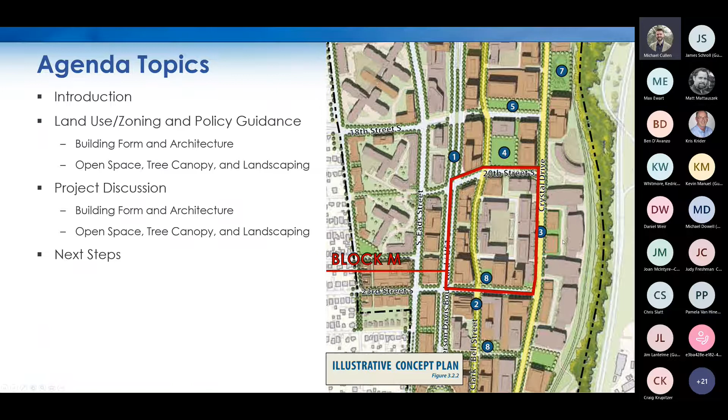So in this presentation, we will include a brief introduction to the site location and project, and we'll outline policy guidance and outstanding issues related to tonight's topics of building form, architecture, and open space.

So the proposed project site is located at the southeast corner of Block M in the Crystal City neighborhood, which bookends the block with the Crystal Plaza 1 project that was approved in 2021. The site is currently occupied by the Crystal Plaza 5 office building and one-story retail shops along Crystal Drive.

The site plan proposal includes 2 new residential towers with ground floor retail at a total density of 12.0 FAR. It includes 2 dedicated public open spaces, including an interim portion of the 23rd Street Plaza known as Open Space 10, and Open Space 11, that is proposed as a public plaza extending from Crystal Drive. The applicant also proposes a new north-south connection that provides parking and loading access located between the 2 towers.

The project would bring the site grade down to the sidewalk level along Crystal Drive and 23rd Street, and in so doing, it would relocate the existing Crystal City underground entrance from 23rd Street to the north side of the site at the end of the proposed Open Space 11 Plaza.

I will also note on this slide that the Crystal Plaza 6 building is located west of the subject site, also known as the WeWork, WeLive building. Redevelopment of that site is necessary to implement both the future Clark Bell Street alignment on this portion of the block and deliver the remaining area necessary to realize the full 23rd Street Plaza park space.

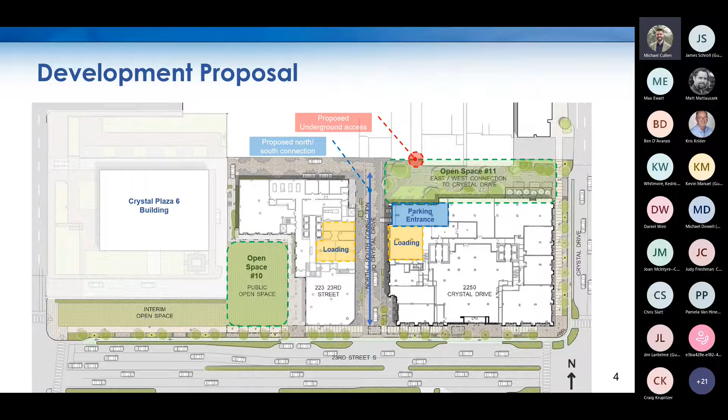So each of the 2 new buildings has been designed by a different architect. The 223 building on 23rd Street wraps around the new interim open space area and would contain approximately 613 units, with over 4,300 square feet of ground floor retail, in addition to retail space that has been added behind the open space.

Both buildings are 30 stories with building heights slightly greater than 300 feet. Both buildings are also proposed to obtain a minimum LEED Gold certification.

The 2250 building is the larger of the two, located at the corner of Crystal Drive and 23rd Street, and it would contain over 800 units and approximately 13,000 square feet of ground floor retail.

Proposed parking for both buildings is 0.3 spaces per unit, with parking located both in an underground garage structure that will be rebuilt on site, as well as a proposal to allow off-site parking located in an existing parking garage that's directly across Crystal Drive.

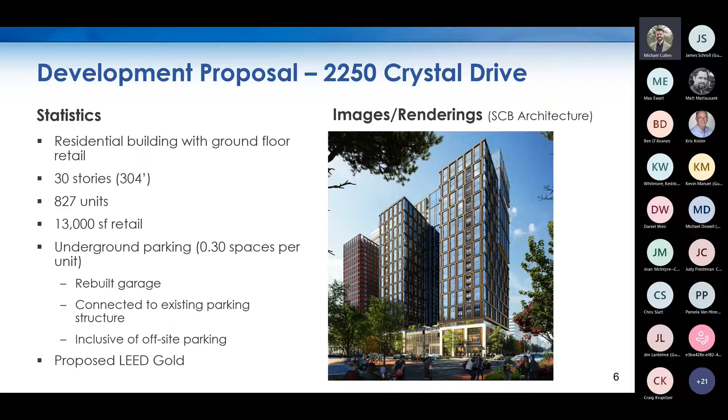The site is also located in the Crystal City Coordinated Redevelopment District with 2 locations for public space identified. The site is currently zoned C-O Mixed Use District, and the applicant proposes a rezoning of the site to C-O Crystal City, which corresponds with the High Office Apartment Hotel GLUP designation.

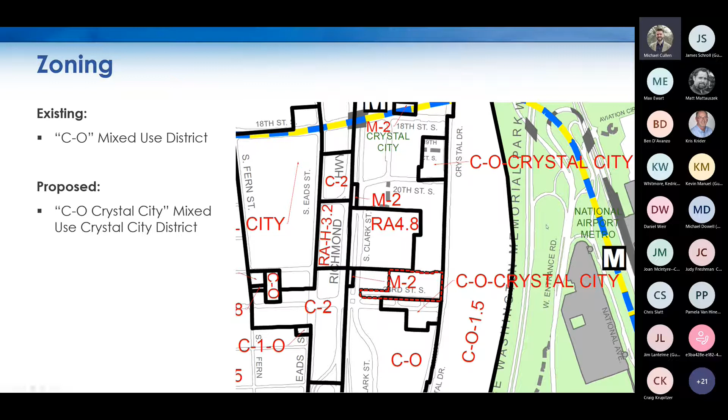Planning and policy guidance for building design and open space is provided in the Crystal City sector plan, and the next few slides outline relevant guidance and recommendations specific to the project.

So the sector plan envisions a land use mix across the block with an expectation that a minimum of 40% of the block be dedicated to residential or hotel uses. Rather than establish maximum density restrictions, the plan sets the limit of what can be considered as, quote, base density.

In this case, the plan identifies densities that correspond with the GLUP, above which any additional density will be required to be achieved through community benefits or tools like the Green Building Incentive Program.

Although additional density can be achieved through community benefits, the total densities achievable are enforced through building form and massing guidelines, including limitations on building height, tower coverage, and building separation, in addition to sculpting parameters for towers and building tops. These guidelines represent one of the primary cornerstones for guiding redevelopment in Crystal City, and in addition to regulating densities, they seek to ensure projects achieve pedestrian-oriented design, a visually interesting skyline, and protection of adequate sunlight and air for public spaces.

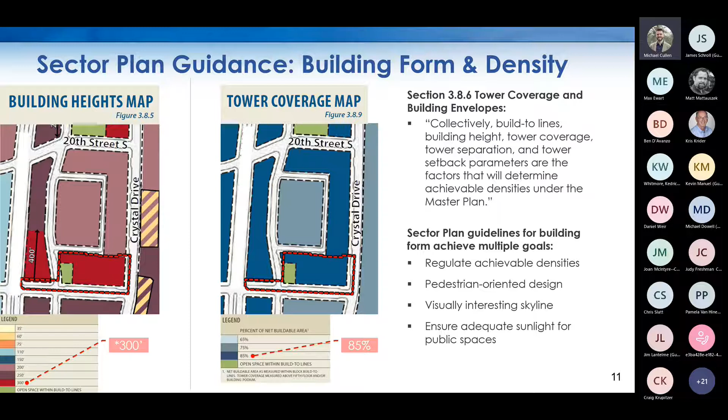As shown on the previous maps, the plan identifies maximum building heights for the site at 300 feet. However, up to 2 to 3 additional stories are permitted along 23rd Street.

Tower coverage, expressed as a percentage of the buildable area that the upper portion of the building beyond its podium may occupy, is limited to 85% of the site, with tower floors to be no greater than 30 to 35,000 square feet on a single level.

Additional guidelines include defining building podiums, tower sculpting through facade stepbacks, and distinguished building tops with further sculpting and enhanced mechanical penthouse screening.

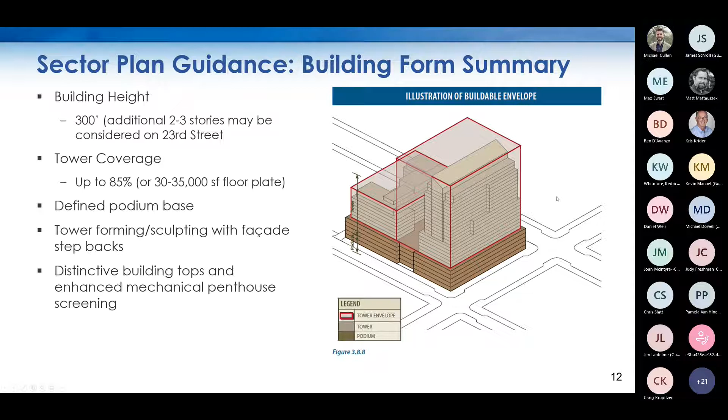The sector plan recommends two approaches for achieving sculpted buildings with distinct podiums, towers, and tops: a multiple setback approach and a single setback approach.

The multiple approach seeks to implement a series of tower stepbacks, both vertically and across the horizontal plane of a given facade frontage, as it rises to the building top.

The single approach suggests that a larger step back above the podium may be pursued when the building is designed as a discrete tower. The implementation of both step back approaches relies on sensitivity to surrounding context and street typologies.

Building tops are defined as the upper 2 to 4 stories of a tower, and the plan suggests that building tops should have a distinct appearance through use of window rhythm, apparent floor height, setbacks, sculpted form, or materials.

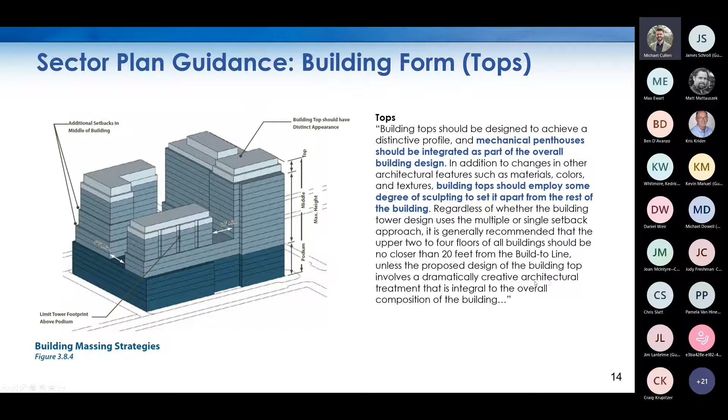Building tops are also expected to maintain consistency and overall quality with the building facade below. Likewise, the plan states that mechanical penthouse structures should also have enhanced facade treatments of a quality and character consistent with the overall building facade.

With respect to architecture, the sector plan emphasizes pedestrian scale design along street frontages with commercial frontage design guidelines such as minimum ground floor heights, encroachments over the recommended build-to line, and window transparency requirements.

The plan also provides some site-specific guidance for the 223 building that includes retail frontages lining the central open space area, shown as a coordinated frontage with unifying architectural language, and future commercial street frontage along the envisioned Clark Bell Street alignment to the west.

The sector plan also identifies required retail use frontages on each block, while also acknowledging necessary space for residential lobbies, building entrances, and similar elements.

As noted in the previous slide, this includes retail frontage lining open space 10, which would also extend to the adjacent portion of a future Clark Bell Street.

The plan identifies goals and objectives in preserving the Crystal City underground system, which provides access to additional uses and enhances each block's pedestrian connectivity, notably highlighting that the underground system will evolve in form and function as redevelopment occurs.

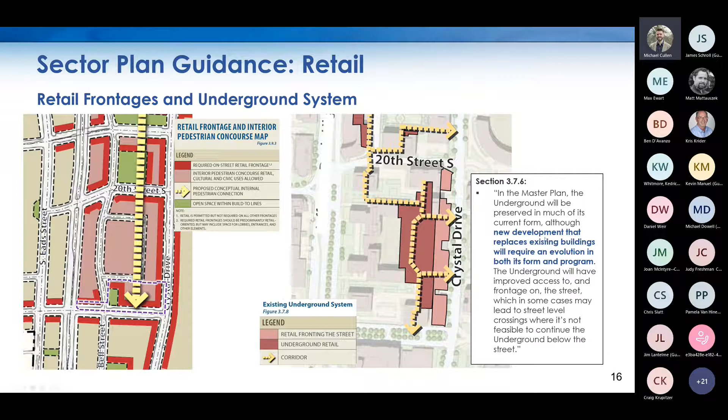The sector plan also identifies 2 new public open spaces, as I mentioned, that are expected to be delivered with redevelopment of the subject site, labeled as open spaces 10 and 11.

Open space 10, known as the 23rd Street Plaza, is a large 13,000 square foot space envisioned to be framed with retail storefront and, quote, noteworthy architecture.

Open space 11, simply described as a landscaped plaza with tables and seating for outdoor dining, is envisioned as a small 3,300 square foot space with flexibility from the exact location identified in the sector plan.

In the following slides, I will go into further details relative to building design and open space and highlight staff issues for consideration.

While staff has provided a broad range of design feedback to the applicant, we identified a few areas where the proposed building form or architecture deviates significantly from the sector plan, specifically tower stepbacks and massing, definition of building tops, and the need for additional frontages with retail pedestrian oriented design.

In this exhibit, areas that were identified as needing some greater tower sculpting are highlighted in red and purple, while the purple frontage indicates areas where ground floor facades should also be designed for pedestrian scale commercial frontages that border either open space or feature street conditions.

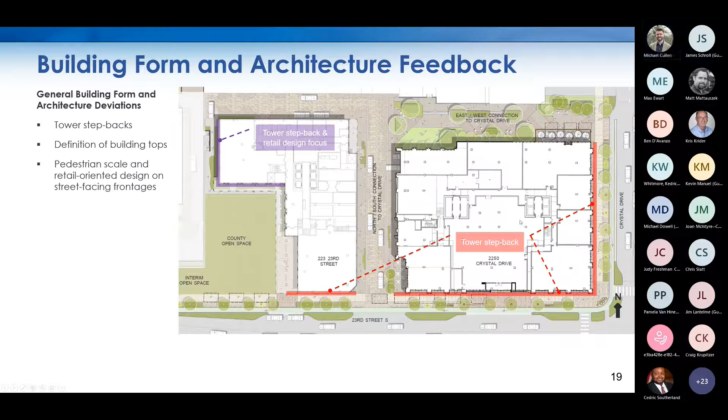Although the applicant has responded to earlier feedback providing what they're calling an alternative building design that introduces some building stepbacks above the podium, there are a few deviations remaining that represent what we would call significant issues for staff.

Among those, the 223 building still does not adequately define the western building frontage that will one day front a future Clark Bell Street, both in terms of tower sculpting and design of the ground floor podium level.

In addition, the building top, including the mechanical penthouse screening, is not adequately integrated as part of the overall building design or architecturally distinguished from either the central tower mass or the south and west wings of the building.

An alternative massing scheme was also provided for the 2250 building, proposing smaller step downs in tower mass for the tower wings fronting 23rd Street, in exchange for implementing tower stepbacks along 23rd Street and Crystal Drive. Although we believe the original design's step-down scheme was more consistent with sector plan recommendations, staff has identified an issue with the asymmetrical design of this alternative proposal.

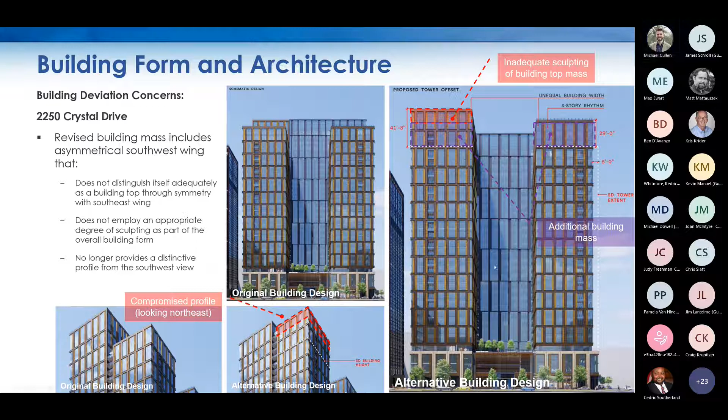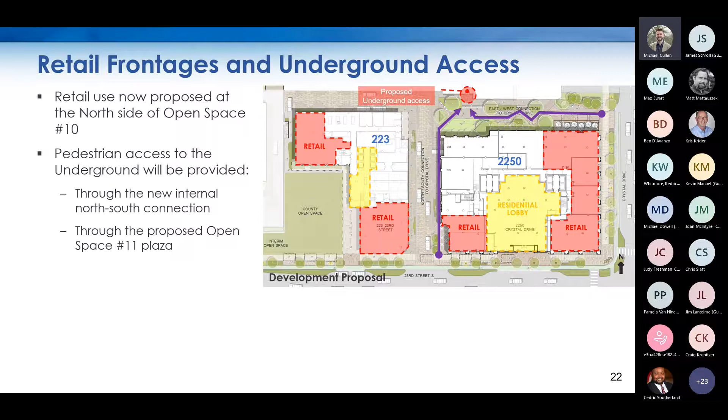In contrast, the project now incorporates retail space bordering the back of open space 10 for the 223 building, as generally envisioned in the plan. As noted previously, the underground system entrance would be relocated, but this is not in conflict with the sector plan, as the project would provide two quality access routes to the entrance, and relocation allows building frontages and public spaces to be brought down to sidewalk grade.

As noted previously, public open space opportunities called out in the sector plan look slightly different in the proposed application. First, open space 10 is proposed at a smaller size, just over 8,000 square feet, as an interim condition, which would postpone delivery of the full 13,000 square foot open space until redevelopment of the adjacent Plaza 6 site and associated final alignment of Clark Bell Street.

The applicant proposes an alternative location for open space 11 by creating a public plaza connection to the underground entrance from Crystal Drive on the north side of the 2250 building. The applicant has revised the proposal to clarify that the entire plaza connection would represent open space number 11. This results in a total area significantly larger than the 3,300 square feet called for in the sector plan, delivering a public open space that would be designed and constructed with this site plan development.

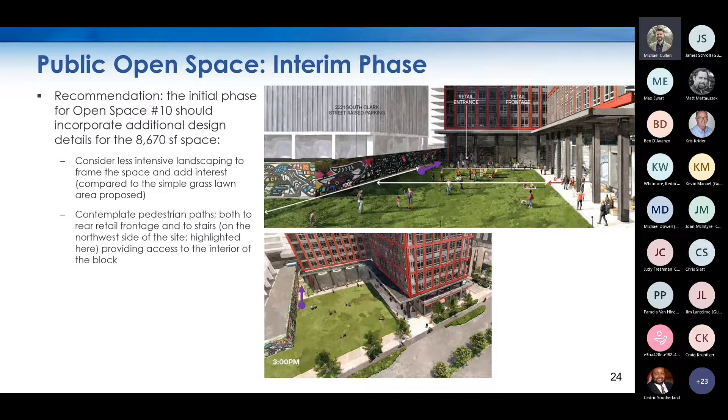Staff has identified one final recommendation with respect to design and delivery of the interim open space 10 condition, noting that instead of a simple lawn area, the interim design could contemplate some less intensive landscaping to frame the space, as well as additional pedestrian paths to the rear retail frontage and to stairs, indicated on this exhibit with the purple arrows, that provide access to the remainder of the block.

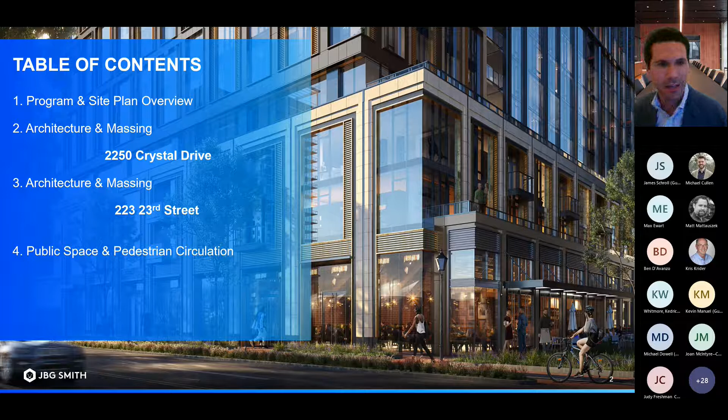There we go. Orienting us to the location of the site at the corner of 23rd and Crystal.

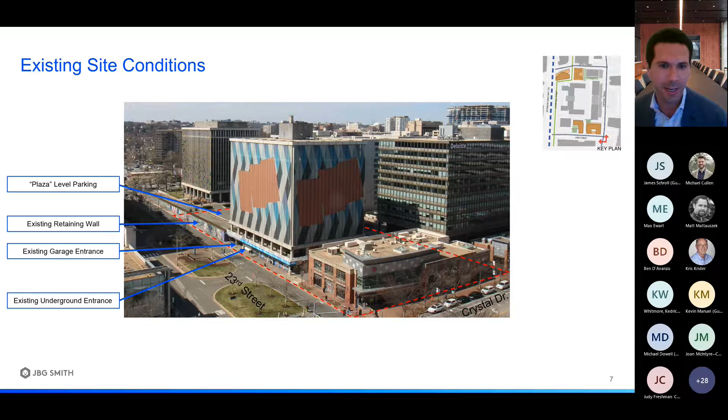Next slide. Looking at the existing site conditions: the existing vacant office building is the main component of the site today, wrapped in that colorful wrap. The one-story retail building on the corner has actually recently been demolished, and behind the office tower there's a surface parking lot. The notable thing is the elevation change across the site, and the fact that the existing buildings are all elevated above 23rd Street on a retaining wall, meaning the existing parking lot, site circulation, and front door to the office building are all above the street and don't engage it.

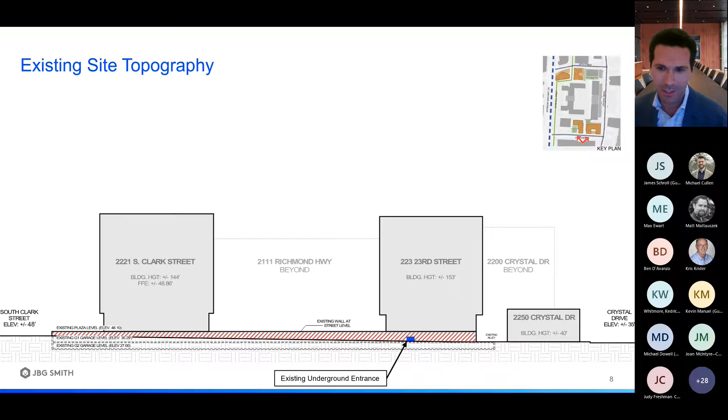So by contrast, on the next slide you will see we intend to correct this with the new development, providing activation and engaging the street on all sides and throughout the site at the true street level.

This is the site plan of our proposed two buildings. I think staff covered this pretty well. Just highlighting with some colors here, we have retail shown in blue, wrapping Crystal Drive and 23rd Street. As staff noted, a change from our initial proposal is adding retail space at the north end, or the backside of the big park down on 23rd Street, to be fully consistent with the sector plan.

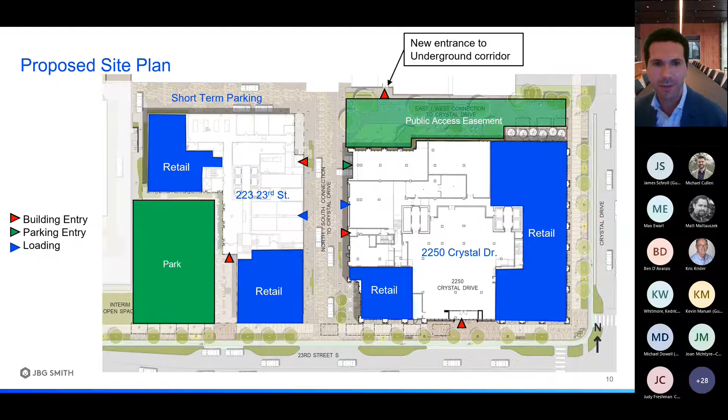The other major change is what we're calling the public access easement at the top of the screen, which is Sector Plan Park 11, identifying this entire space as a single easement for public open space, which will be designed and constructed all together as part of the SPRC process and the construction of the building. And then I think we have one more slide.

Before we hand it off to the architects, just summarizing the two buildings as we initially proposed them. I think staff got to this point, that we have proposed alternate tower massings based on some staff feedback. I think our original proposal reflected a bit of a differing view compared to staff on how our towers fit into the sector plan setback guidance, with regards to whether it was the multiple setback approach or the single setback.

Our initial view was that these two towers were taking advantage of the multiple setback approach, given that each tower is comprised of multiple volumes that step back at different spots up on top of the building. However, we were requested to study the single setback approach, which has a true, approximately 5-foot setback around the entire buildings right above the podium.

I think in either case, we put a great deal of care into the design of the podium on each building to make sure there was a human scale to it, that it was differentiated from the tower above with different materials and rhythm, and having a clean horizontal break to separate the tower and podium architecturally.

We also took great care in the original scheme to make sure the top of the buildings had a variation in heights. With existing Crystal City, all of the buildings are flat on top and at the same height as each other, so I thought it was very important to have towers with significantly different heights at the top.

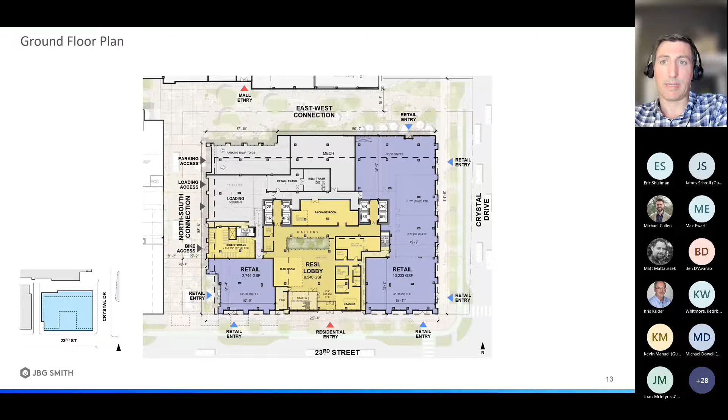Our plan starts here with the large retail space along Crystal Drive, with large, wide sidewalks that provide for an active pedestrian experience. The residential entrance anchors the plan along 23rd Street, giving the lobby a clear and present sense of arrival for residents and guests. A small retail space completes the block and frames the entrance to the north-south connection on the west. Bikes, loading, and underground parking access are arranged off of the north-south connection, and at the north side of the project, the east-west connection will be enhanced with access to the main retail along Crystal Drive. Next slide, please.

The overall building is a little over 300 feet tall on the north side and then steps down 60 feet to the south. The building starts with a strong 3-floor podium that responds to the pedestrian scale of the sector plan, and from there the tower steps back on the north to provide relief along the east-west connection.

The massing of the tower opens in a U shape to the south to increase daylight for the residents and provide a sunlit outdoor amenity space on the 4th floor. The tower steps back from the south to provide a sunny pool deck and outdoor amenity space with sweeping views of the surrounding neighborhood.

A signature moment on the northeast corner creates an outdoor room with dramatic monument views. The sequence of setbacks helps reinforce the building's bottom, middle, and top organization.

As we zoom down to the street level along Crystal Drive, the building sits on a clearly defined podium. The vision for this facade is a refined palette of rich materials, including stone and warm metal tones that frame the large retail bays. The bays are arranged in a scale to bring the comfortable pedestrian experience to the street, and the use of high-end materials and depth emphasize the active retail use and enhance the pedestrian experience.

Integrated balconies above add a livable scale to the facade. And at the northeast corner, as seen here, the retail space will further activate the east-west connection and add to the vibrant urban space.

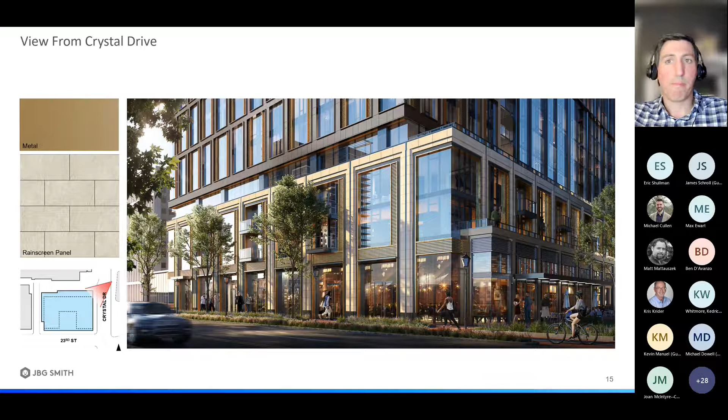As we turn the corner to 23rd Street, the residential lobby centers the facade and is bookended by the stone-clad retail bays. This creates a dramatic break in the podium, and a screen-like treatment then gives residents and guests a sense of privacy while maintaining a connection to the outdoors.

On top of this entrance is an outdoor amenity space, which brings activity and interest to the top of the podium. Here we can start to see the 4th floor set back from the podium, and that creates a feeling of lightness as the building cleanly transitions to the tower.

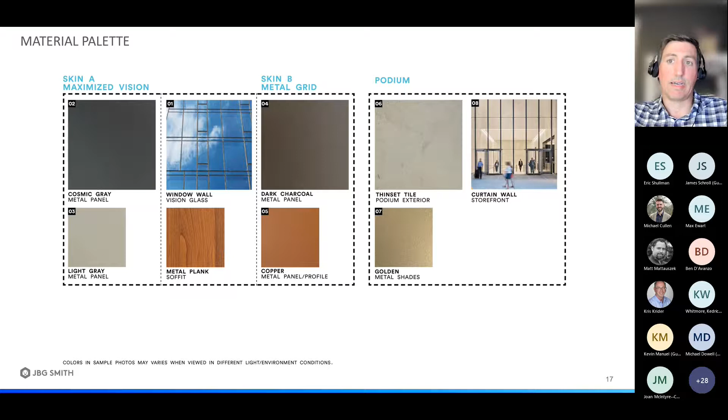This shows some of the materials that we're envisioning for the project. It's a composition of warm metal tones for the tower and a timeless warm stone for the podium. We have accented metallic colors and wood tones that punctuate the facade throughout, and the tower will have high performance vision glass, and the ground floor will have clear glass to maximize visibility for the retail and lobby spaces.

The concept for the facade is to break down the scale of the building by creating 2 distinct skins that interlock and weave together, defining the mass. We use the seams of this interlocking to emphasize the form and incorporate balconies within the slots, giving the building a residential scale.

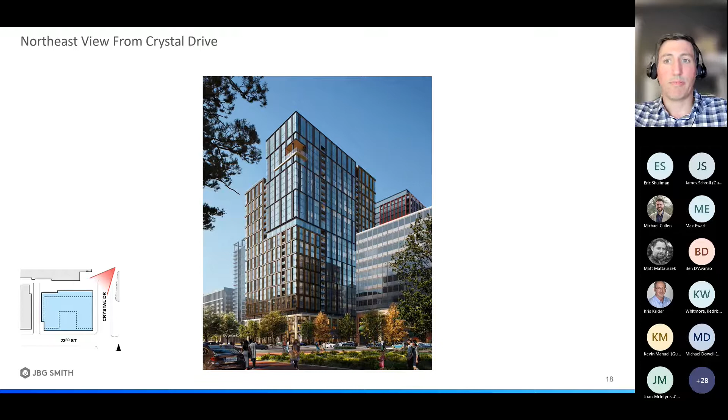The tower sets back on the south, creating a strong and slender profile to the top. The outdoor room that punctuates the northeast corner at the top of the building, as you can see in this view, adds a signature moment that provides sweeping monument views, bringing the energy of the street up to the sky.

Along 23rd Street, the tower is separated into 2 arms, creating relief in the massing and establishing rhythm and urban scale. The material palette of the podium is complemented with articulated metal panels that recall the rich material tones throughout the tower skin. The podium helps anchor the building to the corner, creating a strong presence and establishing a defining edge to the block.

Here's where we start to look at some of the variations we studied based on feedback. The original proposal sets the design back on the 4th floor to create a podium-defining reveal. The county staff has requested a 5-foot setback at the 4th floor that would extend the full height of the tower along Crystal Drive and 23rd Street.

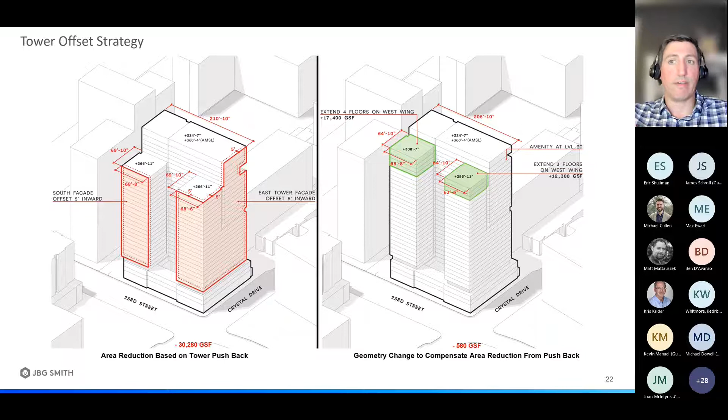We studied this, and in the following slides you'll see the massing setback above the podium, which is a 5-foot setback along Crystal Drive and 23rd Street. These diagrams show the 5-foot setback on the left side and the area that has been displaced, which we've moved up to the top of the building. The floors 1, 2, and 3 below have remained unchanged between the 2 schemes.

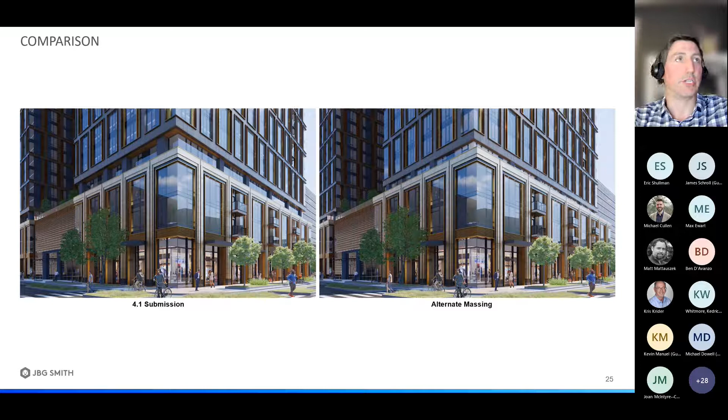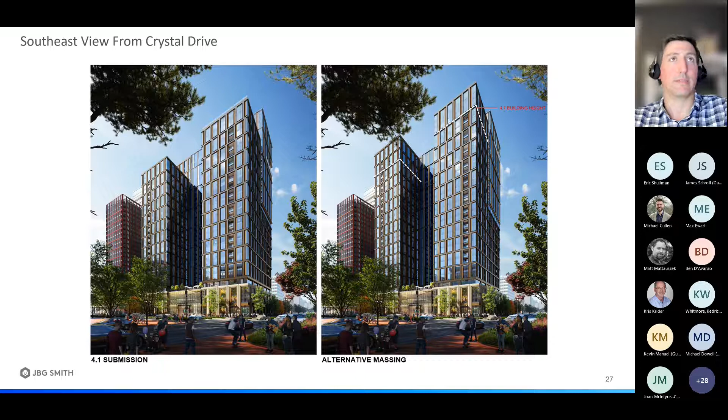We have a white line there that indicates the overlay of the original proposal on top of the new one. This side, as mentioned earlier tonight, represents an uneven height between the two arms. The south arm on the west is a slightly taller massing than the arm on the east side.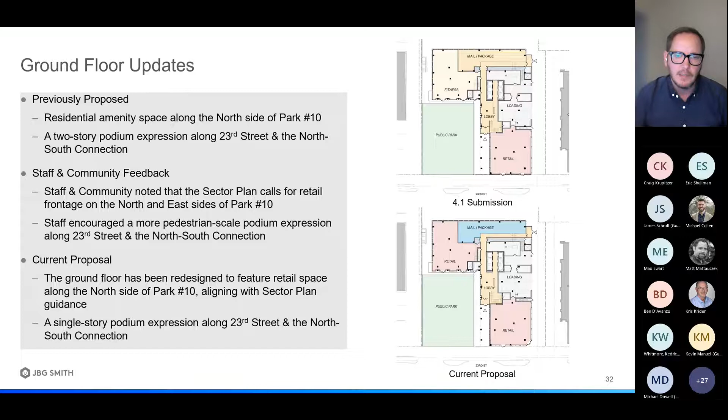I'm here to present 223 23rd Street. We're going to start off with some updates on the ground floor that were already discussed by Michael. As requested by staff and the community, we have changed the plan at the ground floor to incorporate retail on the north face of the public park. You can see that in the slide.

Taking a step back and looking at the overall organization of the ground floor, you can see we have those two retail spaces flanking the public lobby. The lobby has frontage along 23rd Street and a secondary entrance on the north side, with loading facing east and mail and package rooms at the north end.

Taking a look at the podium in the next slide, you can see a side-by-side comparison of how we changed the previous proposal with a two-story expression. That podium had a two-story expression with metal-clad columns and brick masonry infill at the retail.

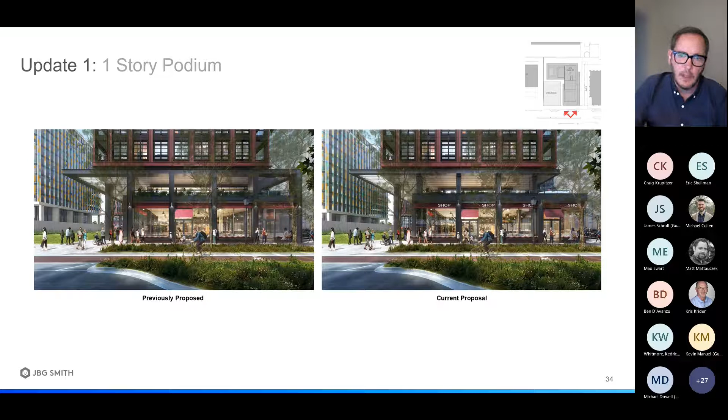We've actually come back to an earlier design that we think is more appropriate to the pedestrian scale, and I think staff agrees, to have a one-story retail pavilion with masonry cladding, and the two-story expression being more of a reveal zone between the two.

As we come along to the west side, forming a colonnade capped with a cornice and a canopy that creates a horizontal datum at the second floor. At the north end, you see we changed the expression to have the retail expression as one story, again having that reveal zone before the tower starts on the third floor.

One last thing we heard about this podium expression, on the left side of both of these images, is to wrap that retail expression around the corner. We didn't really have renderings that showed this very clearly, but we took the one that was most representative from our previous design on the left.

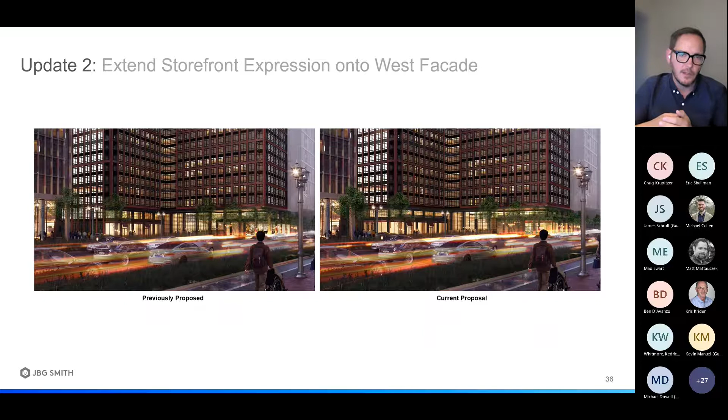You can see on the right how that retail expression is now wrapping around the corner, going about two-thirds of the way along that frontage before allowing that retail expression to continue.

Taking a look at the north side of the building, here we are at the secondary entrance. When we changed from a two-story expression to a one-story expression, we had on the left the two-story expression for that residential secondary entrance. With the change to a one-story expression, you can see here a more modest and appropriately scaled version of that secondary entrance.

Now taking a step back and looking at the overall architecture, we organized the building as an L-shaped volume with two wings, the north wing and the south wing. The south being a shorter wing, lower in height at 25 stories, with a setback at the 26th floor.

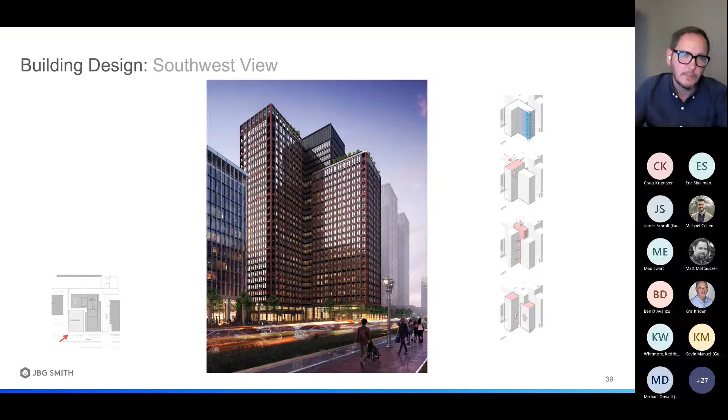The north and south wings are connected by an element we call the clip or the pin, that has a different facade expression which joins these two together and allows us to rise to a greater height with mechanical bulkhead screening. Just want to give the applicant a heads up that you have 15 minutes remaining.

Looking at the building from the other side, you can see we've carved out loggias at the corners to lighten the expression of the building, and the enlarged facade on the right shows some of the materiality.

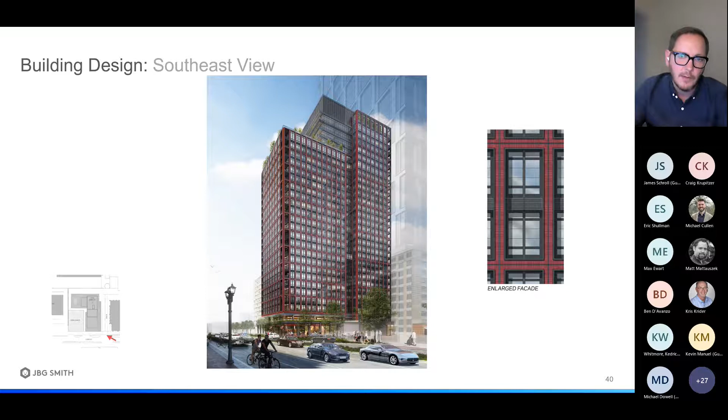We have glazed brick set in a decorative pattern in precast panels that have charcoal precast as well in between. And we have a 2- and 4-story expression.

The south volume has a 2-story expression, and the north has a 4-story expression. On the north side, you can see how we've lightened the building at the top with a loggia that has eliminated every other bay to allow for greater lightness. On the right, you can see some of the materials in detail: the glazed brick, the textured precast concrete in charcoal, and the metal panel cladding for the windows and railing.

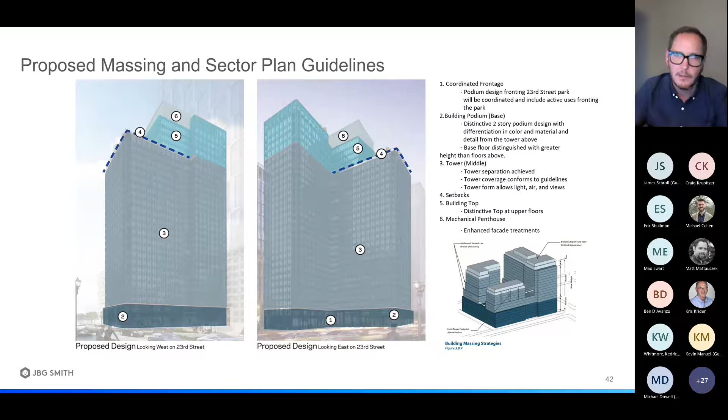Then, moving on, we wanted to provide that coordinated frontage that was mentioned. So at the ground floor and also above, we have frontage that faces the park with coordinated design. The top of the podium is finally made distinct by a horizontal datum, as you can see by this cornice line illustrated here.

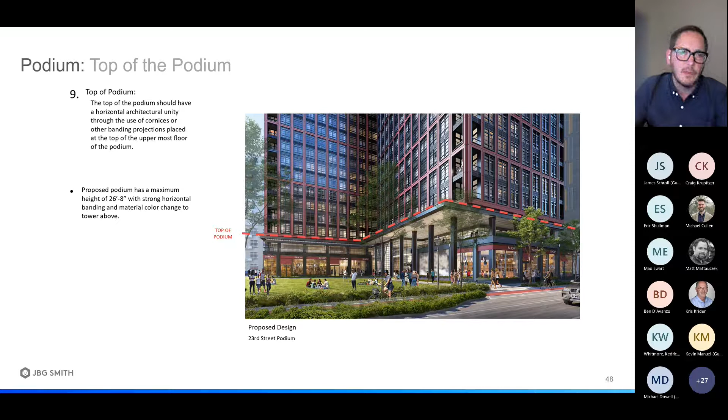Moving to the top, we wanted to show a little more detail about the materiality. The element that screens the mechanical is this louver, this kind of reverse louver that has a nice expression creating horizontal banding and capturing the light in a very distinctive way. This precedent on the left is not our project, but we have used this on a recent project.

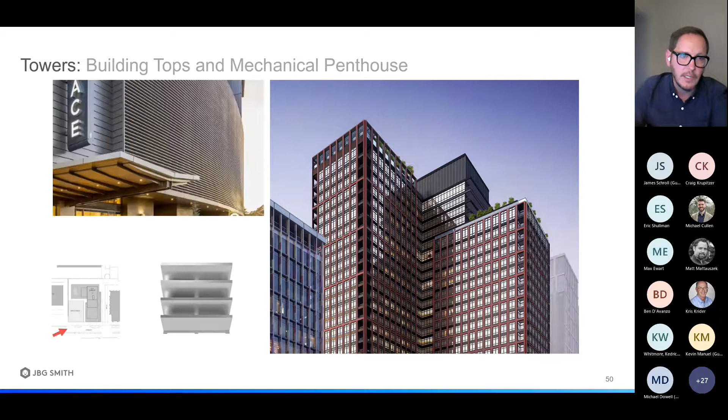At the top, we also wanted to highlight that this meets the sector plan guidelines of having a distinct top. The top rises to a greater height. We have 3 steps in the building, creating what we think is an elegant composition, and then screening the mechanical penthouse with that metal material.

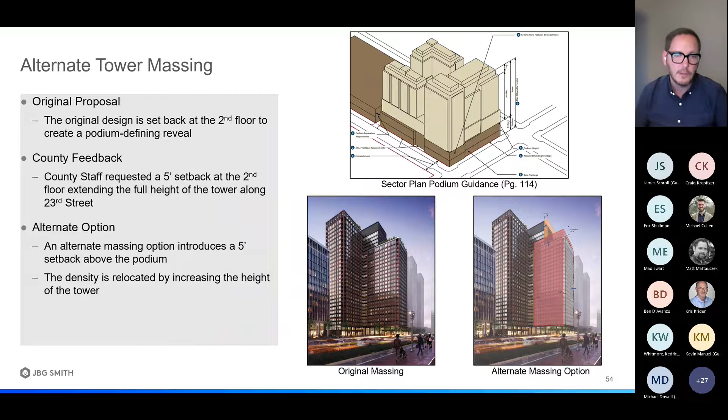Moving along to the alternate tower massing, again we were asked to incorporate a 5-foot setback along 23rd Street. So we've illustrated 2 versions in 2 views of that: one is our current original massing, and the alternate massing on the right.

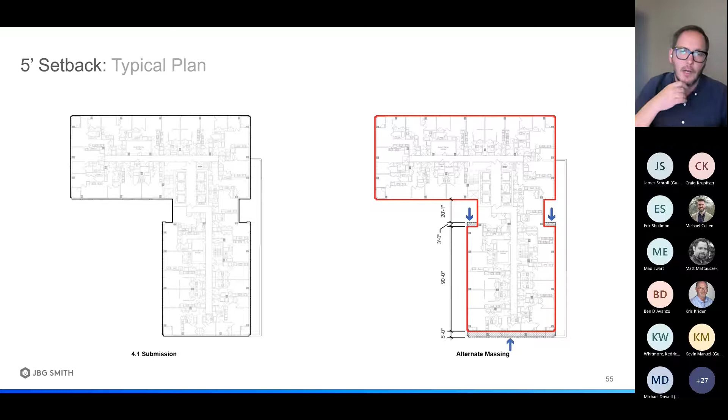Moving to the plan view, you can see how that works itself out in plan. The 5-foot setback above the second floor for the tower as it rises up. We added a 3-foot setback on the north side of the pin, or the clip, because it really worked better with our modulation of the facade and the planning for the building. It also helped with the proportions.

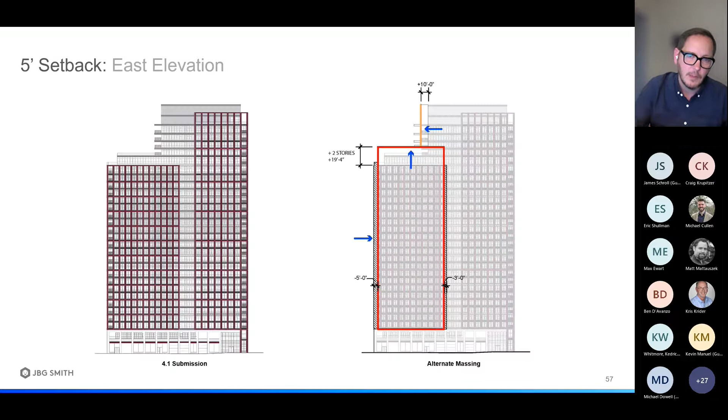You can see here in a side-by-side comparison of the elevations. As we narrow that volume, the south volume, we raise it up 2 more floors to make up for the lost area, and we also extend the clip 10 feet further to the south. You can see that same diagram on the east, and then moving to the 3D views.

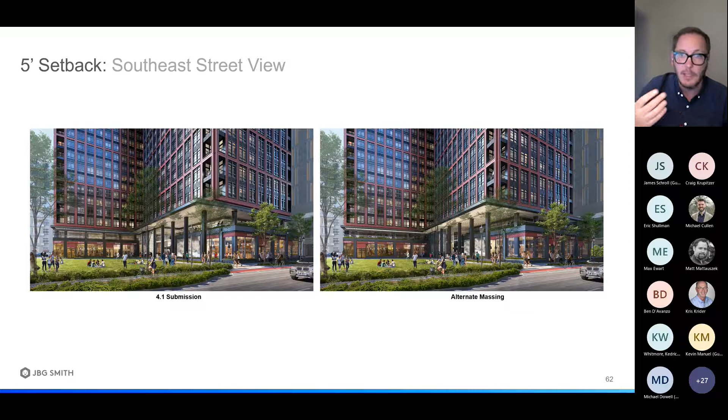Coming to the ground floor, where again, to echo Craig, I think this is really where the intent of the guideline for the 5-foot setback was to improve the pedestrian scale. You can see no setback on the left, and with the 5-foot setback on the right. The next slide illustrates the same in a frontal view.

And I think the views speak for themselves. With that, I'll move to public space and circulation.

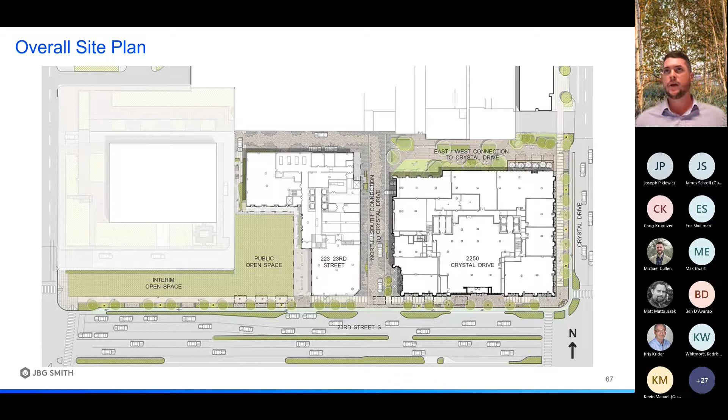This is the overall site plan, so you can see that public open space tucked into the 223 building, the north-south connection between the two buildings, the east-west connection which is Park 11 north of 2250, and then the clear and organized sidewalks around Crystal Drive and 23rd Street.

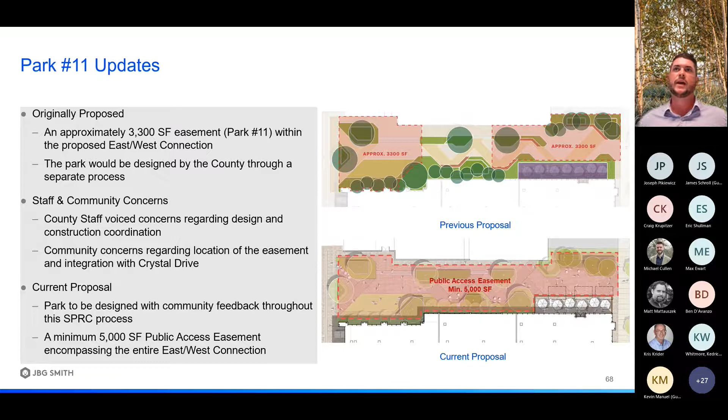Next slide, let's go into Park 11. At the top is the previous proposal, showing the 3,300 square feet of open space, and the plan at the bottom is the current proposal showing a minimum 5,000 square foot public access easement for the entire open space.

The next slide shows that in greater detail. You can see the new underground entrance. This is intended to connect Crystal Drive through this public plaza, public access easement, to that entry.

The hardscape materials create a pattern that starts movement through the space, creating nooks for public seating, public access, and lingering through this entire zone, making a connected plaza from Crystal Drive to the underground.

The next slide shows some of these site features, including raised planters, integrated benching, and stairs that lead you down from the different plaza levels, and the retail extends north of 2250.

The next slide is a section showing the cross section from Crystal Drive all the way through the east-west connection, culminating at the end at the north-south connection on the far left.

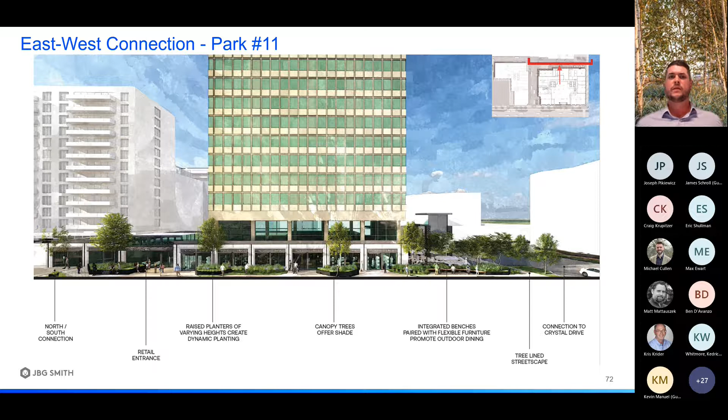Next is a series of images working from east to west. This is an image from the Crystal Drive sidewalk looking in, with retail on the left, and public and integrated spaces on the right and down the center.

This is 2250 on the left and 2200 Crystal Drive on the right with the underground entry, with signage and a canopy in the upper right-hand corner.

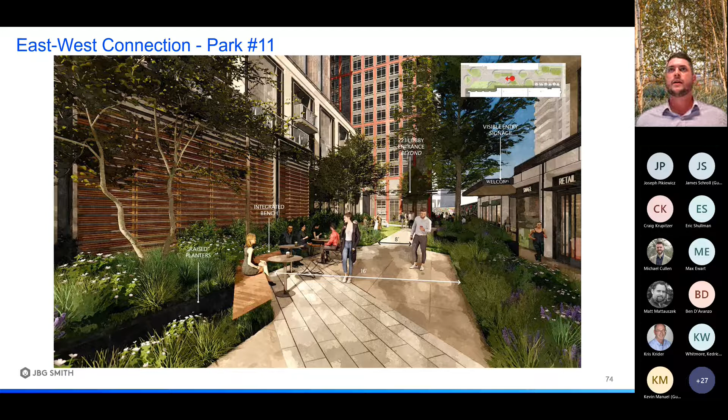This is a view looking back to the east from the end of the north-south connection at the 2200 underground entry. You can see the open plaza with some lawn and flexible furnishings.

Next is the north-south connection. This is an integrated shared street, with vehicular and pedestrian connections, completely curbless.

A paving pattern runs from one side to the other. We have 8-foot sidewalks and a 26-foot drive lane down the center, with planters working their way back and forth, corresponding with entries on both buildings and also providing protection for pedestrians as they move from north to south.

It's anchored with retail at the south and two trees that you can see in the plan. We'll go through a series of images now.

This is an overhead view. You can see the curbless design and the planters, guiding pedestrians north towards the underground from 23rd Street, anchoring that retail in the lower right-hand corner.

The next image is at grade from this view. You can see the bike room for 2250, retail on the left for 223 and on the right for 2250. The next image is looking back towards 23rd Street.

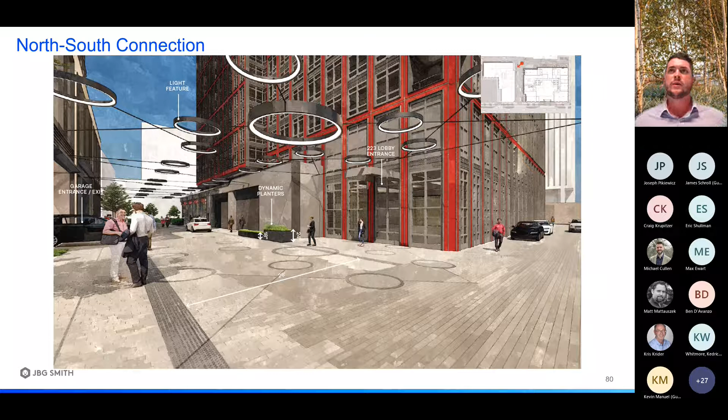Again, you can see the retail and the variety and style of planters we're looking at. The next slide is from the end of the street at the 223 lobby entry, and the east-west alley on the north side of the 223 building.

The next slide goes into the phasing of Park 10. This shows the interim phase, with the 8,000 square foot interim open space.

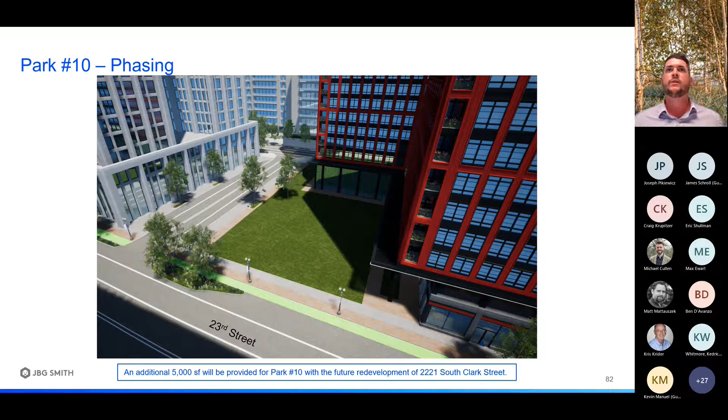And then the next slide shows South Clark Street coming through, with the additional 5,000 square feet of open space once that redevelopment occurs.

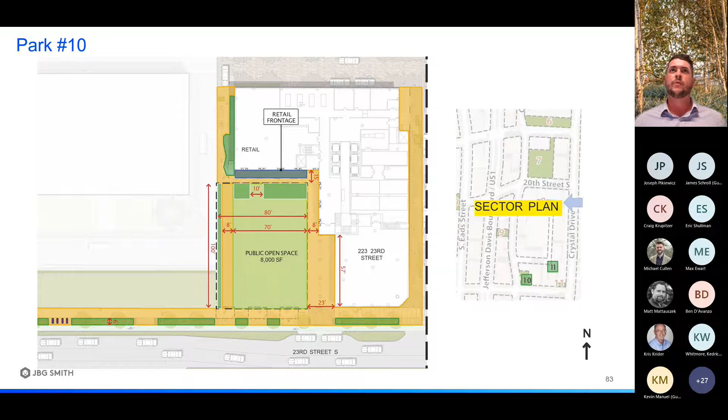So Park 10, again, 8,000 square feet of public open space. We've heard the county staff comments about providing additional movement and pathways through this space, and some additional plantings.

on the north end that culminate in that additional retail frontage that Joe just discussed. I believe the next slide is a section cutting through 23rd Street through to that retail. You can see the sidewalk in the distance running along that raised interim condition with the wall there. We have this large lawn with some plantings along the north side, and then the retail frontage against the building.

And I believe our last slide is the section cut in the other direction. You can see both of those walking paths leading you back to those stairs, leading you to the retail on both ends, and creating this great open space in the interim condition. So that's all we had.

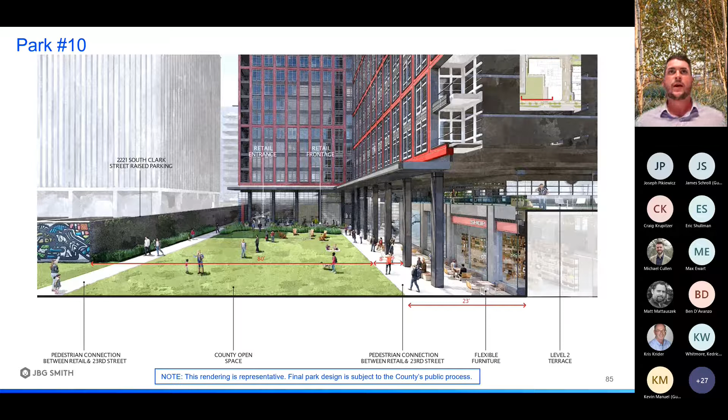Does that conclude the staff presentation? Yes, applicant is all done. Okay, great. Well, thank you for that, and I appreciate you moving through that quickly.

So the conversation is now with the members of the SPRC. The way I'd like to handle our discussion about architecture and open space this evening is the following: I'd like to do architecture first, starting with the 2250 Crystal Drive building, then moving to 223 23rd Street. Then I'd like to talk about open space, going through open space 11, open space 10, and the north-south connection. So let us start then with any questions.

Comments on architecture for the 2250 Crystal Drive building. And a reminder to members of the public, if you wish to sign up for public comment, please type that into the chat function. Commissioner Van Hine, hi, you can hear me okay?

Yeah, I fully support the staff's recommendations to create a difference between the podium and the basic structure, the tower. What I miss with the new design is when you're looking straight at it from 23rd Street, you had a lovely T shape that came up between the two sections that came out. And when they raised those two sections up, you lost that. I think that was a really key part of the design. I also share concerns about the asymmetry of that.

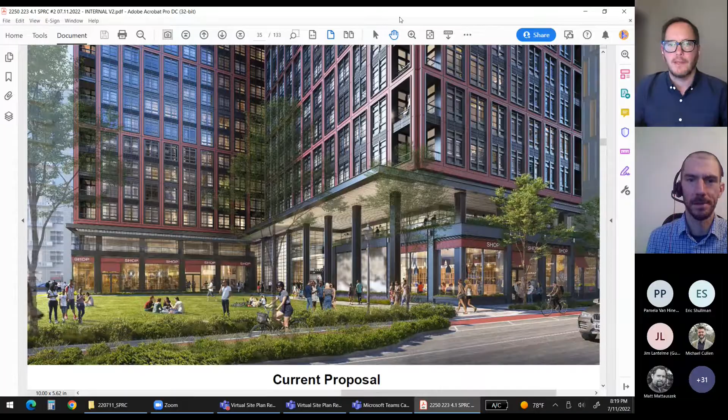I don't know how to stop presenting. Oh, there. Thank you, Commissioner Van Hine. Any other feedback on this second building, second tower? Are people generally in agreement with Commissioner Lantelme? Do people like the alternative, or do they like the initial option?

Commissioner Van Hine: I totally agree with Commissioner Lantelme. The second version is better, and do something more with the top. But yeah, it's fine.

Thank you, Commissioner Van Hine. Well, as a former commissioner once said, if you agree, I don't need to hear from you, but if you disagree, I need to hear from you. So I'm interpreting silence at this point as agreement with Commissioners Van Hine and Lantelme that the alternate version with the kind of modifications we're discussing with the architect are amenable to folks here on the SPRC and folks in the neighborhood.

So if that's what I'm hearing, then we can move on to the open space discussion. We can move on to open space 11. So let's move on to that. If we could maybe pull up a good plan view diagram, at least for our base discussion, that would be good. Do we have one that has... well, this is good at least to get us started.

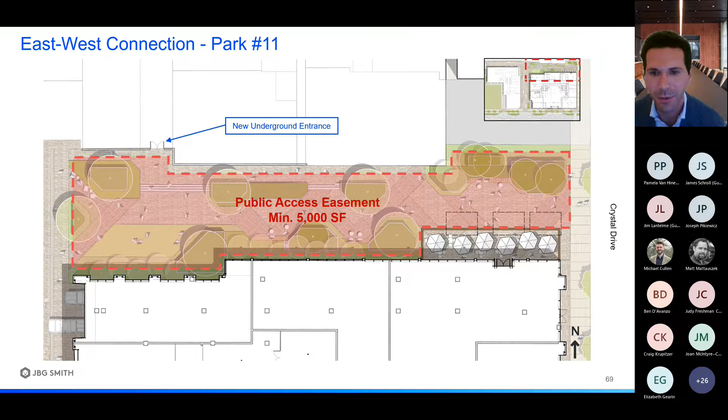If I could expand on our staff's position, the sector plan does specifically call for outdoor dining as part of this open space in its description. Given that the overall area provided is larger than envisioned, and this is actually the widest point of that open space, we haven't identified that as a concern. The alternative would be that the access easement would include the outdoor dining space, but then the applicant would have to come back in with a use permit application. So it would still be possible to have outdoor dining in this exact location with an access easement over it, but we didn't think it was necessary, given its consistency with the sector plan.

Those are helpful comments, thank you. We still need to encourage people to come in, though.

I think the applicant does have a rendering of this that has the cross-section dimensions. What is posted online is slightly different than your version. The online version is, I believe, slide 75. Commissioner Van Hine, if you want to look at that, or if the applicant wants to bring that up, their version is good as well in plan view, and there are also some renderings.

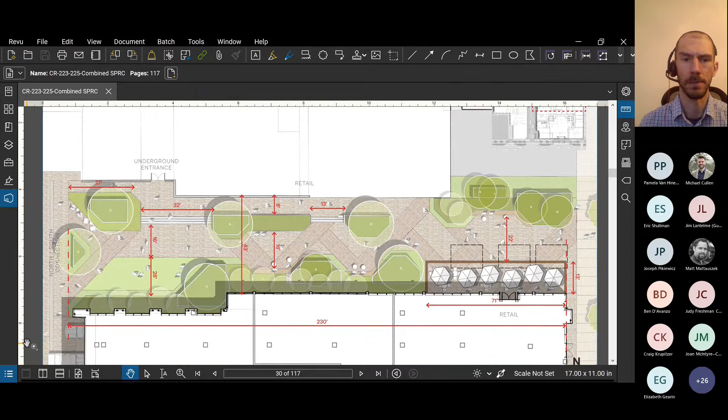All right, Commissioner D'Avanzo, or Mr. D'Avanzo. I'm only a Mr.

So I agree with Pam. Maybe you don't need to change the dining, but I think there is a need to make this feel like a park, not an alleyway. And of course you all have landscaping, but you've got a nice alleyway. So I figured I'd offer some suggestions, and I have a question as well that I'll end with. I think you will definitely need some wayfinding, ideally at both ends. You would have a park, it would be a named park, and you'd have a 'park name here' sign that makes it clear that it's a park and that people are welcome.

Including potentially the lighting, taking the lighting that you have on the north-south connection and bringing it over here might be something to consider. An even more elevated way would be to add potentially a water feature, since this is a long park, you could have a water feature going from one side to the other, like a stream, to add some real biophilic element to it, or think about what public art opportunities there are to really do some placemaking here. So it's not just a place to walk through, but rather the purpose of the park is a place to be, and I'd be interested in that.

And then I'm interested in the stairs that go into the underground and how accessibility works with those, and why they're necessary versus whether it'd be possible to achieve it through a grade change or anything like that, whether the stairs are necessary.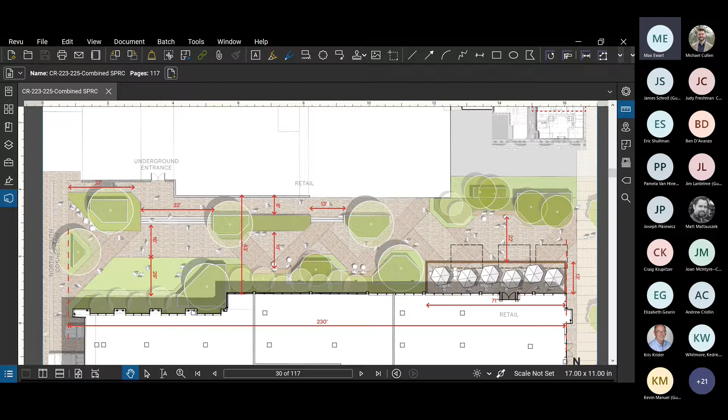Max: Thank you, Michael. There's nothing really more to add to that. We're requesting that the applicant fund, design, and maintain this space, and collectively through these processes, through the SPRC and other engagements we've had, figure out the design as we go along, seeing what works, what concerns are, and how to troubleshoot things to make this space feel as welcoming as possible.

So is it safe to say that the design of this park will accompany the SPRC as it goes to the county board? That's correct. Okay, go ahead. The drawings associated with the 4.1 submission would then become the guiding document as the applicant pursues building permits, and as this is constructed, it would be constructed with the overall project. Thank you, Mr. Cullen.

So we have heard some detailed feedback tonight about a variety of suggestions. If members, particularly of the surrounding neighborhood, have additional feedback, please send it to staff, but please also engage the applicant. And if there are more comments this evening, this is why we're trying to do this at the first meeting, so that there's an opportunity to see revisions at meeting 2 in September, as this will be designed as part of this process, and won't be a separate park design process. Any other comments, feedback, or questions about park or open space 11?

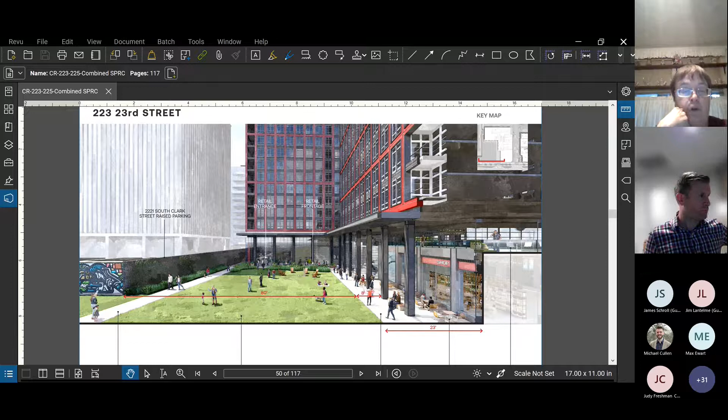I would agree with Commissioner Lantelme, and actually this is a general observation of all the parks and open spaces of the project - they're pretty stark. They're really not biophilic. So I think there's a lot more opportunities to put in more biophilic elements, maybe trees, shrubs, plants that would make it better, and then maybe create smaller spaces for people to sit and relax. And the other thing you have to consider is with increasingly hot summers, creating some shade for people to cool off the area.

Especially with a lot of the concrete in some of the areas.

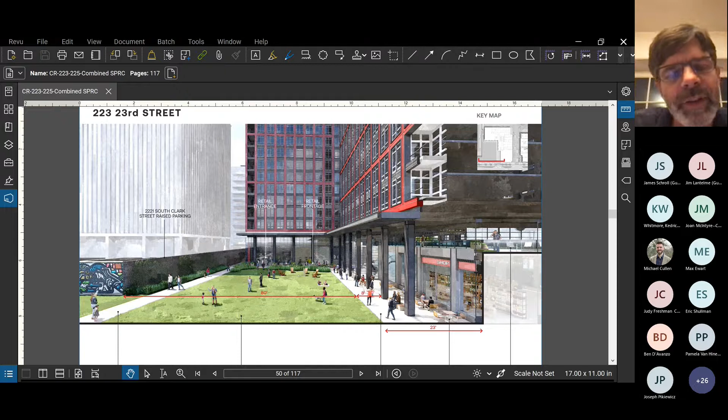I do like that the retail's been added to the north end of the site, but of the open space, but it worries me that because it has a break in the retail along the east side, I'd see us having trouble activating and keeping that retail site going because it's going to be hard to pull people in there from the 23rd Street side. So it kind of feels like something has to happen - either make the retail continuous along the east side, or something's going to have to happen with the design of that park to pull people in there. Otherwise, it's just going to become a lonely space.

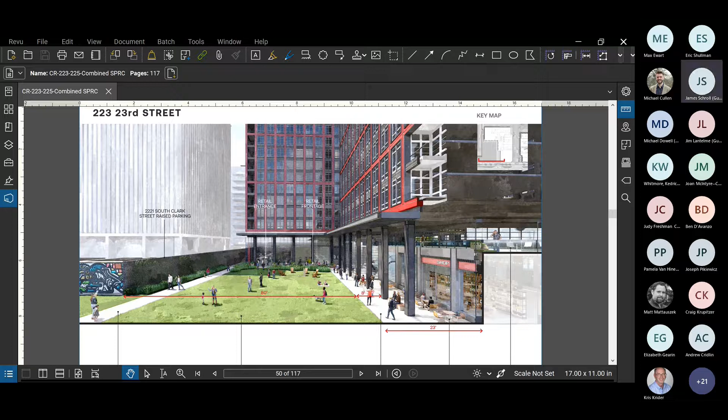Okay, Commissioner Van Hine. Thank you. I agree with comments so far, and I thank people for their comments. One thing I would suggest adding to your space is lawn furniture, which you can reuse as necessary later. I am curious what the time frame is for this interim space. Are we talking 2 years, 5 years, 10 years? That would be a determining factor on how we would want to populate it.

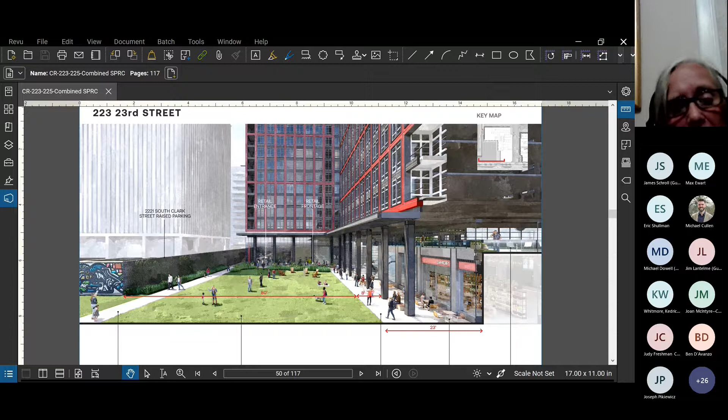And my final question is, I think I read somewhere that in the sidewalk space on the west side of the building, there was a potential connection to a staircase that would go to the ground above. Did I imagine that, or is that something that is happening? And I think that's a great idea.

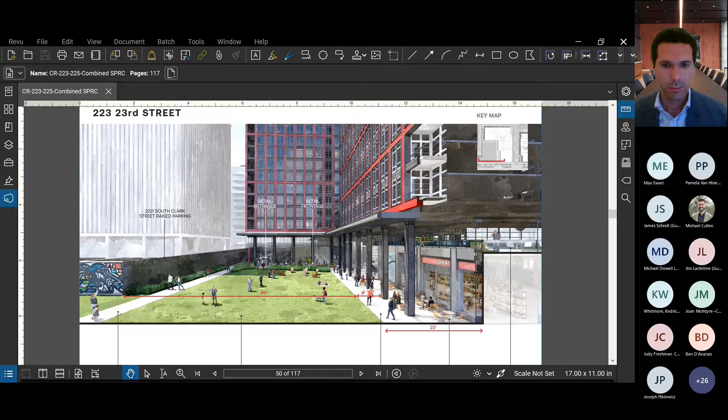Mr. Ewart, yeah, really quickly, I'll hop in as far as timeline goes. Recently approved by the county board, the CIP identified FY25 for planning for this, for the permanent public space. So not decades, but not next year. But we have a kind of light at the end of the tunnel for when this will be happening.

And on the stair, you were not imagining that. You can maybe just barely make it out on the very left there. We had a closer rendering in the online package, but I think we cut it out of this one for time. There is a stair there that gets you to the higher grade, where there is some green space and trees, directly north of the site, and directly west is kind of the parking lot of the We Live building and a connection out to Clark Street.

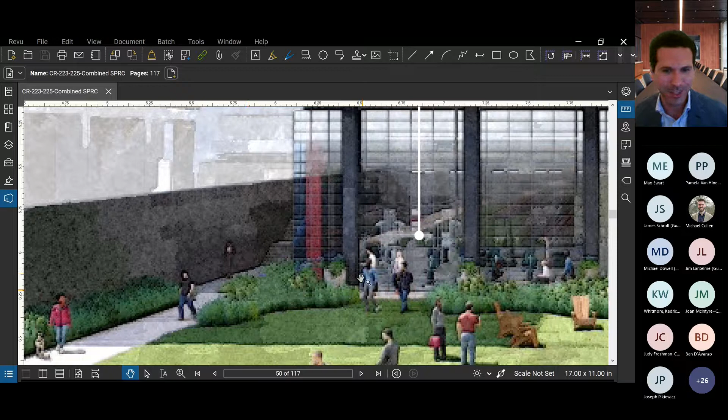The stair is required for firefighter access, as the road up there currently is the fire access for the site. So there are some constraints to work around with regards to that. But otherwise, we do imagine, when there's not a fire emergency, that the general public could be using those stairs to cut across the block.

Thank you. I'd like to go to Mr. D'Avanzo on his feedback, and then I'd like to move on to the north-south connection. Mr. D'Avanzo.

Thanks. So Commissioner Fontana is right that this will be a dog park if you do not plan against otherwise. It's unfortunately how things go here. It will become a pretty unusable space because of the waste. I recommend you think about that. It's off camera in this picture, and I don't think you included it in your renderings, but that exposed space from the street shift to the west, maybe make that into an interim dog run or something like that. That's one option to address this, or a dog run even in the park. If you're going to have any lawn elements, even with furniture or plantings, it's going to be a dog park unless you provide an alternative or have really strict enforcement.

My other comment, this hasn't come up, but I don't know if anything can be done about it. I just want to express a kind of disappointment that in the final vision, part of what's counted as open space is a strip of land to the north and west of the building, where the stairs sort of are now, that's counted as park space. That seems like it'll just be a planting zone along this freeway, not park space. So it feels odd to be calling a small piece of whatever it'll be in the end, along Clark Bell in the final condition, part of the fulfillment of this park. But in general, I agree with other comments that this bare lawn is not going to work for the retail or the neighborhood. So I encourage some creative thinking.

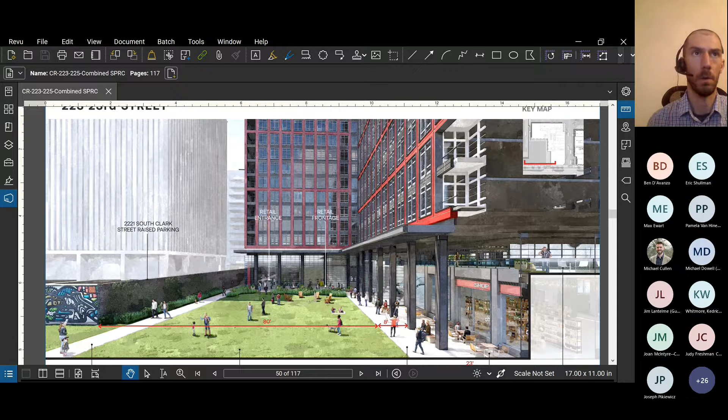Thank you, Mr. D'Avanzo, and for all the feedback on Open Space 10. It seems like there's a consensus that more needs to be done here, and that what is shown right now is insufficient to meet surrounding neighborhood needs at its location.

Can we move on to the open space, or the north-south connection? The applicant can bring up a good vision or version of that, and then would welcome feedback, questions, concerns, and feedback on the north-south connection.

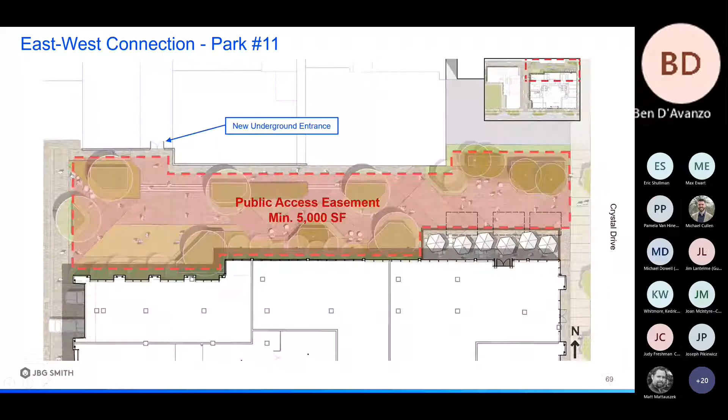All right, sorry folks, I think I got disconnected for a moment, so thank you for bringing up the north-south connection. Commissioner Van Hine, and then Commissioner Lanteime. Hi, a comment or two comments or questions.

I like having the circular lights above as a way of lighting the space, so that way you don't have to provide street lights and take up more valuable space that we need for other things. And I'm questioning why the travel lanes are 13 feet wide. That seems awfully wide. Could they be narrower, so we could have more space for pedestrians?

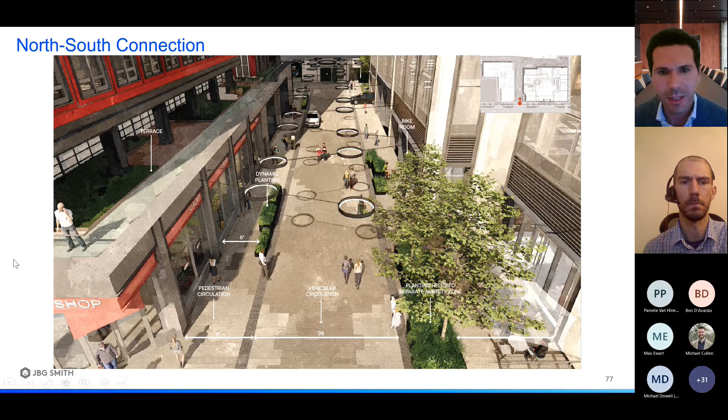Thank you. Can the applicant speak to the dimensions of the street there? Yes, you can speak to that. The dimensions needed to be that large to accommodate the truck turns into the loading docks. I believe we had posted that online. I don't know if we have a chance to bring it up right now, and I don't want to slow us down, but we can distribute that and make sure we bring it up at the next meeting.

It's basically those truck turning movements. Just to have the turning radius work, the lanes needed to be about 13 feet in each direction. Since we're going to be doing transportation and streetscape at the next site plan meeting in September, Mr. Shullman, if you and your team could make sure to have the auto turns, we can have a full understanding of what vehicles are going to be utilizing this space and how they can operate.

Commissioner Lanteime. Yeah, since we're going to talk about transportation in the next one, I won't get into a longer discussion on this. I'll just focus on the design, which I think is the right way to go, having it be curbless, not just asphalt slapped down, but rather pavers with a design to the pavement. I think that will naturally slow the cars and trucks that go on it and make it more inviting to pedestrians. So I think that's the right way to go. At 23rd Street, will the sidewalk be continuous across it, so it looks more like a driveway apron rather than a street going through? That's the one question I have. I would advocate for that, by the way, and not have it be a simple street, but have the sidewalk be continuous along 23rd. Thank you.

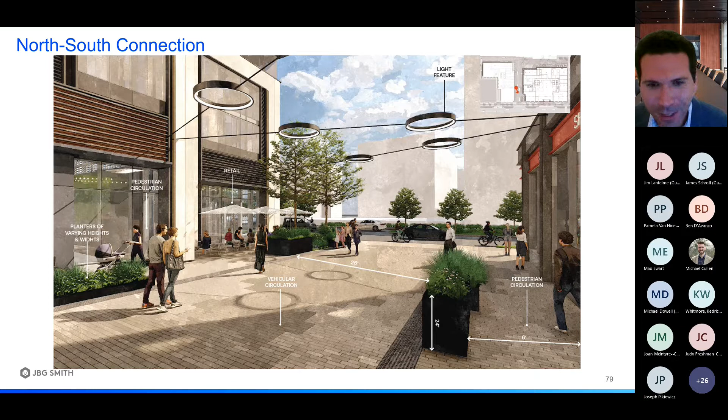Let us explore that. I think we've shown it a couple different ways across the different images. There's a Dominion vault lid that goes here. I think the intent is to have a continuous sidewalk as we see here, and the plan probably shows it in contrast. We've gone back and forth, but we've landed on the continuous sidewalk through an apron, and then the pavers start north of that. We'll make sure we show that more clearly for the next meeting.

Thank you, Ms. Freshman. One thing that's come up in other discussions is whether this is a street or an alley, just what the references are. I'm assuming it's private and maintained and controlled by JBG. When we get to transportation, also look at the east-west piece that goes behind the 223 building, and how traffic movements will work there. Eventually that's going to go to Clark Bell, but in the meantime, is it a turnaround? Is it parking? What happens back there too? Thanks.

Mr. Cullen, do you want to handle that? I don't know if we have anybody from DES Transportation. We don't, and I think that may be something we could address more fully at the next SPRC. I know that question came up at LRPC, because that space, I don't even know what to call it, the alley drive space at the back of the building, has been shown differently across different drawings by the applicant. So maybe they want to expand a little more on their current thinking, but I agree there should be more details provided at the next meeting.

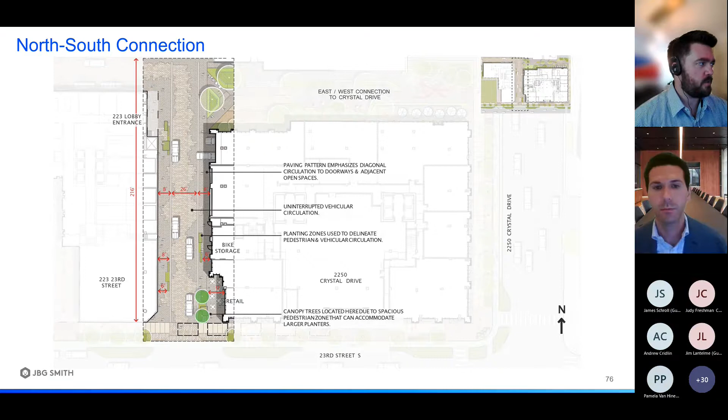Yes, we can provide more details. The main intent, I believe one of the very first 4.1 submissions might have shown that generically as some type of color like green. I think since the acceptance we've been showing it consistently, though different images that have gotten out into the public might have had the older versions, which is confusing. The intent, Judy, you're correct, right?

Eventually this space connects through to Clark Bell. Similarly to what we talked about in the interim open space, we wanted to make sure, first and foremost, we don't propose any trees back here, since they would eventually need to come out to make that roadway connection. Also, being uncertain of how and when the connection would land, we're making sure we don't do anything too permanent. So the intent is short-term parking, which we can get into in more detail at the next meeting about transportation, but to try to take some of the Amazon delivery, quick unloading and loading that a resident might do when moving in and out, and try to move those uses back into the block and off the main streets to make traffic circulation better.

Thank you. Ms. Freshman, anything? Yeah, I just meant to ask, I'm sure this will come up next time, but what is the relationship between the timing of these projects going forward and the improvements for 23rd Street, and if one precludes the other. Thanks.

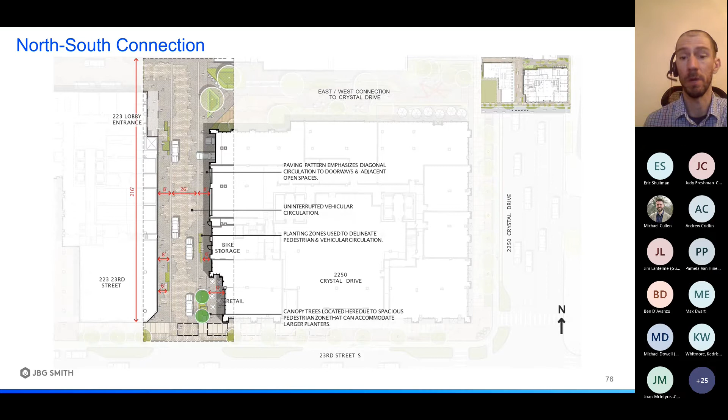Okay, I'd now like to go to public comment. My understanding is we have one person for public comment, and it's Dr. Byrne. Dr. Byrne? Yes, hello.

I have a number of comments about this. First of all, my biggest concern is this is not biophilic. There's really a lot of pavement, mowed grass, lawns, as you've all commented, and this is simply not biophilia. I would first like to start off by saying, look at the 4.1 submission, which has a conceptual land use plan. The conceptual land use plan doesn't really say what it is. It says what the plantings are, it says 4 different planting types. That's it.

Apparently they expect to do this in the final plan, which will be submitted after the county board considers the item. This is not good. The public has to review this before the county board does. Some of these plants can be invasive, etc. Therefore, the planting plan needs to specify those plants.

Since the County Board has a monarch pledge to increase monarch butterflies, it should include common milkweed, a lot of it, because that's the only milkweed, Asclepias syriaca it's called. That's the only plant that monarch butterflies feed on and prosper on in natural areas. You must have that in there, and that should be specified. I hope you have that added to your 4.1 submission before it comes to the site plan committee next time.